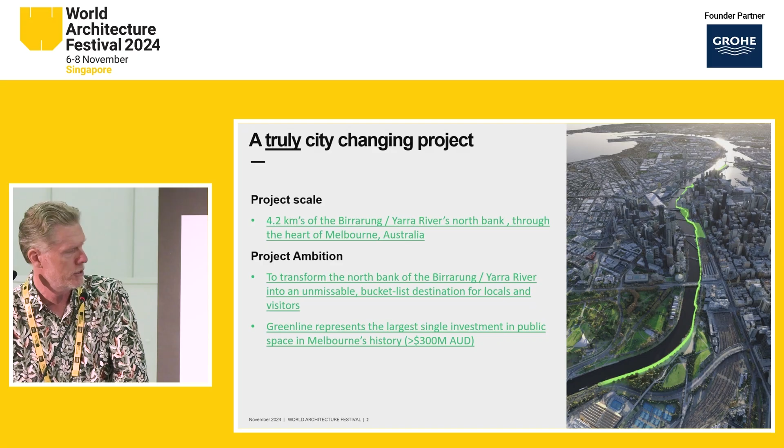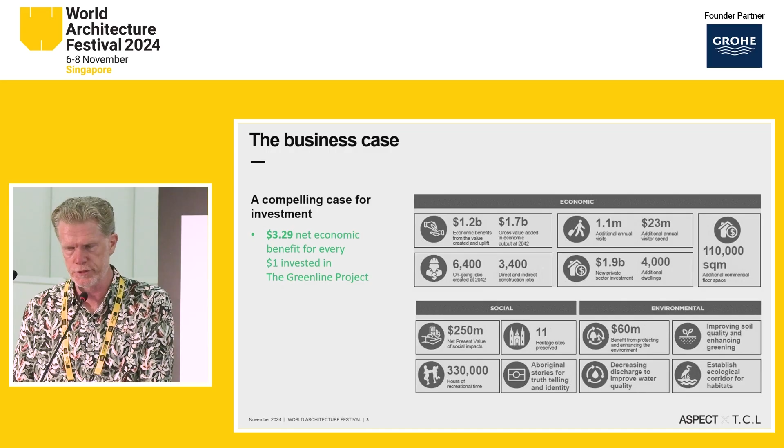The Green Line represents the largest single investment in public space in Melbourne's history, at around $300 million. Now that figure has come out of an economic study that was done for about a year as a business case. The economists came to the conclusion that for every dollar of that $300 million put in, there'd be a $3 return for the economic uplift of the region, that being the city of Melbourne. Now, if you look at the diagram next to that, there's the socio, there's the environmental, and there's the economic. But one of the most important things is the bottom right-hand corner of the social, which is the importance of Aboriginal stories and truth-telling as part of this economic equation.

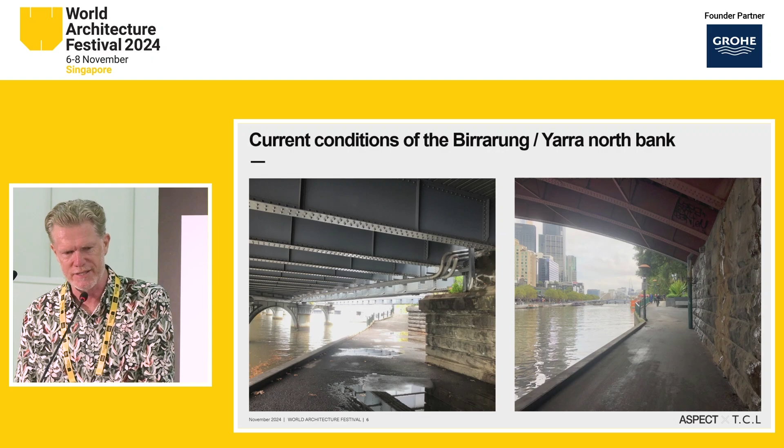This is what the site looks like today. It's a narrow path on the north side of the river, overshaded by bridges, both historic, but fundamentally it's a hard edge. It lacks ecology. The only ecology it does have is some African grasses and London plane trees. On the left you can see the old architecture is overrun by cars and misused. The main entry on the right you see next to Flinders Street Station is poorly utilised as a pedestrian space. Undercrofts which are undesirable, and fundamentally we've treated the river as a drain for the last 100 years. It's a hard edge, it lacks ecology, both aquatic ecology and terrestrial.

Now the important thing about the way the Wurundjeri see the river is not only is the river a living entity, so is country. Country is plants, is animals, country is you and me. We're all part of country. And if you look after country, country looks after you. This idea of reciprocity, it's a reciprocal relationship.

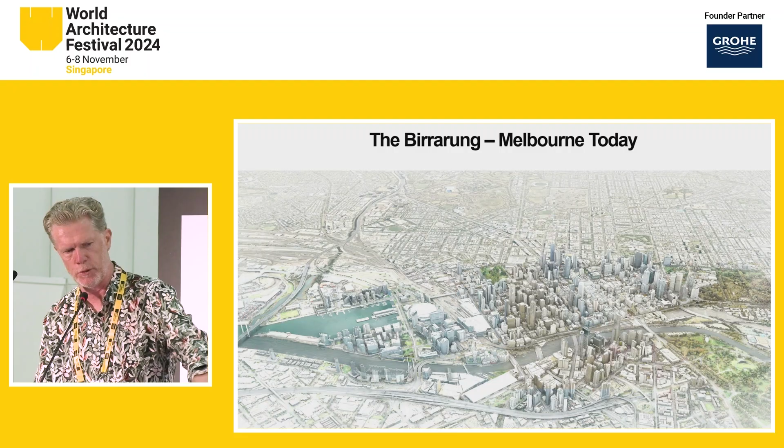The aim of the project is to embrace this idea of a reciprocal relationship and re-establish an ecology that we've studied and know used to be there. We have a broad team of engineers. We understand the bathymetry of the river, the hydrology, the flood patterns. Our ecologists understand what's in the river, what's next to it, and what's upstream. We know what we can entice back, and we know how to do it.

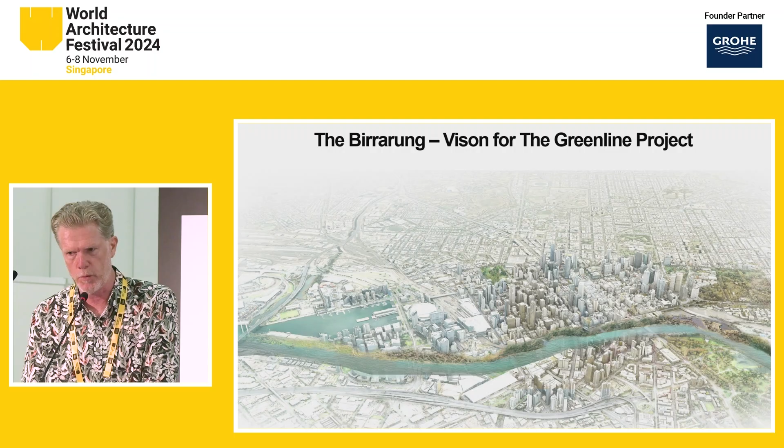And on that note, I'm going to hand over to Matt, who's going to explain. Thank you very much, Scott. So I'll start by describing our project vision.

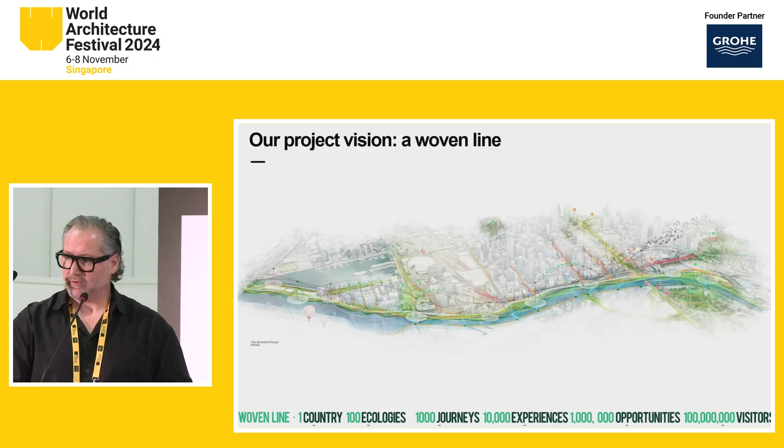We conceived the idea of a woven line as a strategy that brings everything together for this project. It wove together the complexity, the ambitions, the constraints, the communities and stories of the site. The vision begins with redefining the site as Wurundjeri country, focusing on repair of the river's ecological systems and creating rich experiences and economic opportunities alike.

The Green Line, as a lineal promenade, ties together a number of existing and proposed open spaces along the river. The ambition, as Jan Gehl describes it, is to create a journey akin to a string of pearls, a curated and engaging experience linked together by a coherent promenade.

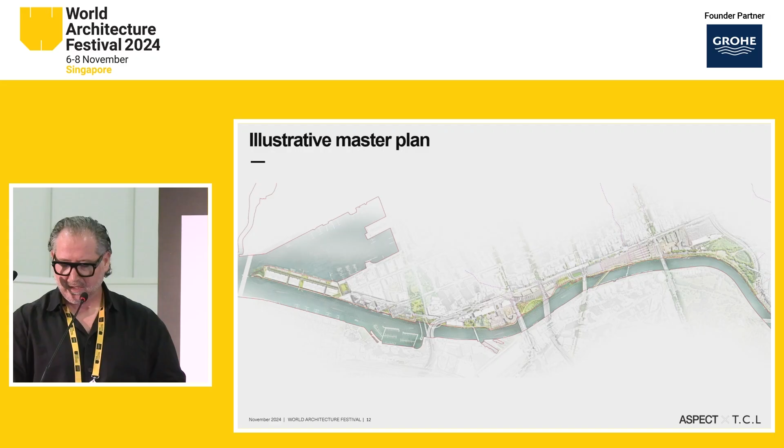To do this, we had to overcome considerable challenges, including barriers, low bridges, land ownership restrictions, and simply no space for the promenade to exist. So the master plan is conceived as an inspiring vision that cuts through these challenges and constraints, inspiring the community and stakeholders to come together to realise the potential for our North Bank.

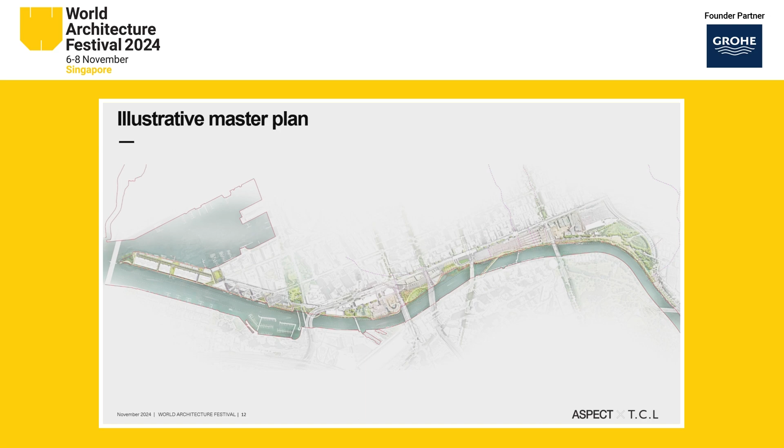We'd like to take you on a journey through the Green Line master plan, beginning at the eastern end of the site, towards Birrarung Marr and our key public square, Federation Square, and then to the west, finishing in the emerging harbour.

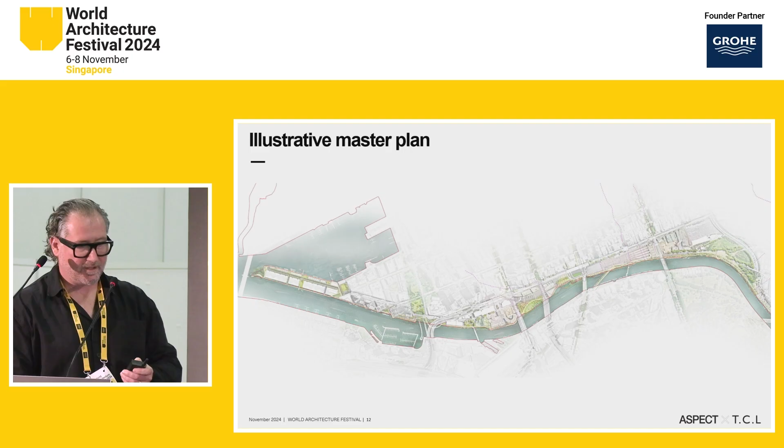Below Flinders Street Station, we see one of the most unsafe and uninviting spaces within our city. This is a primary location where people come to visit the river.

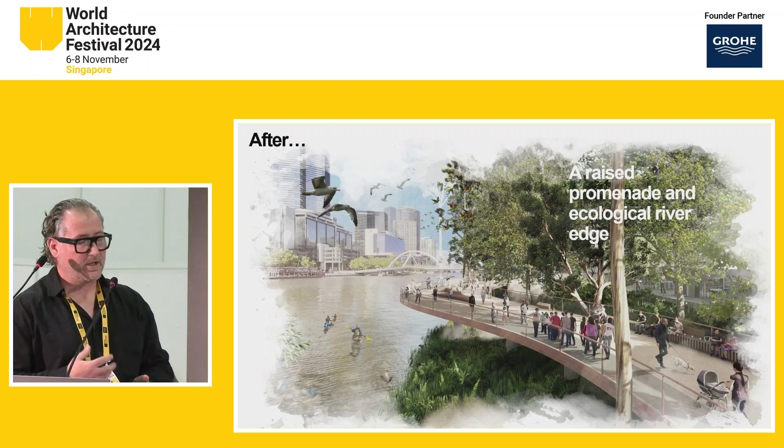Here we saw the opportunity to create a universal access moment from the station down to the river, a ramp structure which elevates itself, but importantly sits above a new riparian edge, or reconstructed riparian edge to the river, something you'll see in a few of the images we're exploring.

At Banana Alley Vaults, this is part of the historic fabric of Flinders Street Station. It's essentially an underutilised space, very dangerous, unsafe at night, and with limited access to the river.

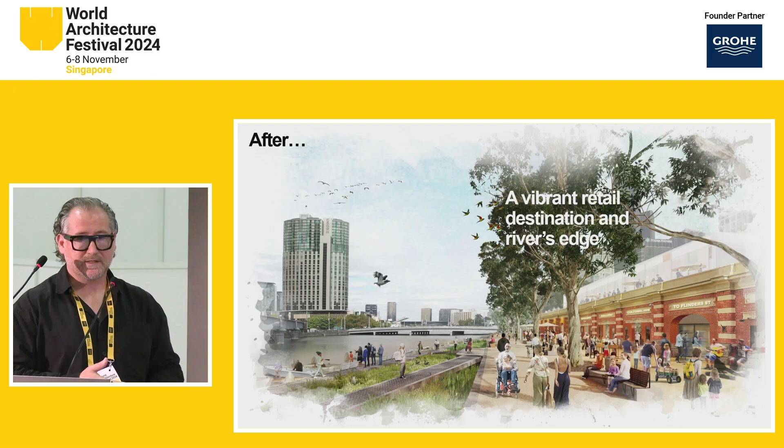Here we saw the opportunity for one of those key nodes and destinations along the journey of the Green Line, reactivating the Banana Alley Vaults with new uses, and establishing where we couldn't get the riparian edge, using floating wetland systems, which are being trialled at the moment, as a way of bringing ecology back into this public landscape.

Many of the spaces only acknowledge one layer of cultural history, and that is the contemporary Melbourne colonial history. We've been working closely with the Wurundjeri, as Scott described, to imagine how we might bring their cultural values, knowledge, and history of the river back front and centre where it doesn't exist currently.

Scott also talked about the channelization of the river. This is the turning basin, the moment where contemporary Melbourne was founded. The ships couldn't go any further up the river because the falls existed at this location. The falls were then blown up and the saltwater and freshwater systems merged in our city. But this is a moment where settlement occurred.

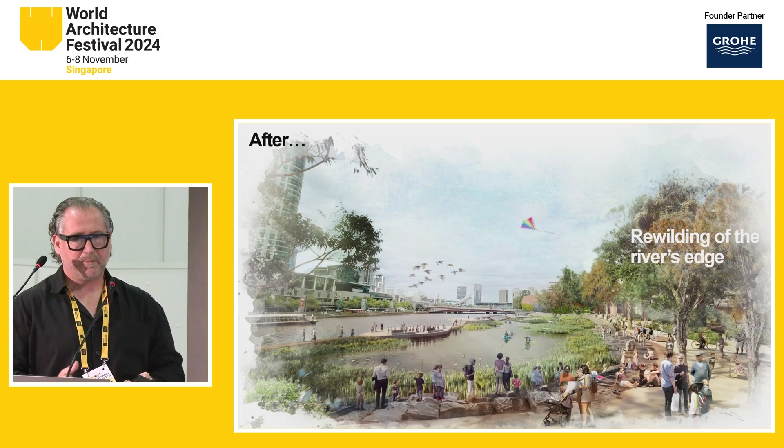Thank you, Jeremy. We're looking at renaturalising this system, breaking down the barriers, giving the river back its lands and its space.

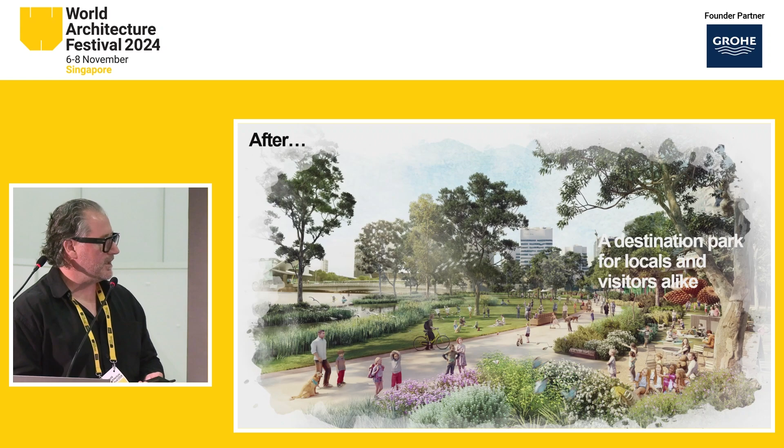Under viaducts, we look at creating active spaces for teens and youths to use. To the west, one of our main parks in the city really has no identity or reason for occupation. We're imagining a destination play space set within a natural landscape, an indigenous botanic garden here, and again the renaturalisation of the river where we can.

In the west, we see a lot of these post-industrial landscapes. With limited opportunity for intervention, we're focused on how we can acupuncture ecology back into the existing framework we have to work with.

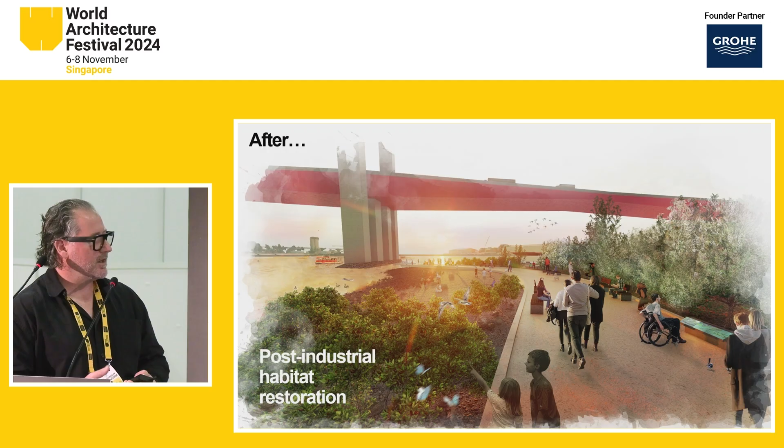Finally, at the end of the Victoria Harbour Promenade, a landscape which is currently derelict, we saw a key opportunity to recreate or re-establish what this existing ecology of the river landscape might have been. So at Point Park, essentially a reconstruction of nature in this location as a destination point.

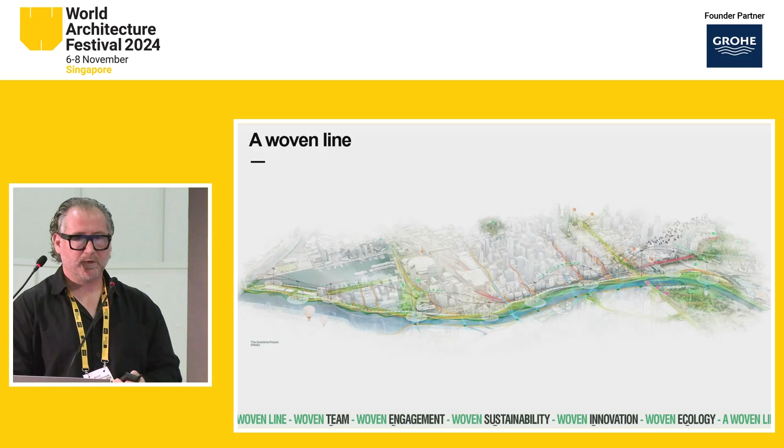So finally, the woven line as a strategy has been something we've used to bring together stakeholders, to unite everyone in a common vision, to bring designing with country to the front and centre of the project, to create a coherent design vision which has been very strongly embraced by the Melbourne community. Thank you.